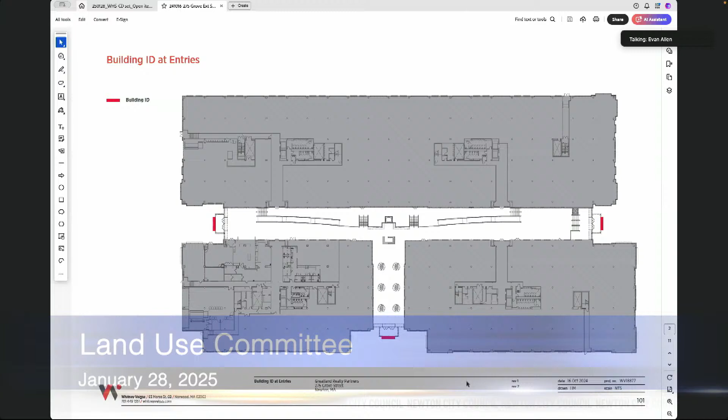As a general orientation to the site and the layout of the building, the structure is really comprised of 3 buildings that are joined together by an atrium, which is this sort of T-shaped white area you're seeing down the middle. Primary entrance to the building off the street is over here at Plan East, with secondary entrances at Plan South for the parking lot and Plan West for an external parking garage as well. So the area we're going to be focusing primarily on today is this area over here at Plan East, which faces Grove Street.

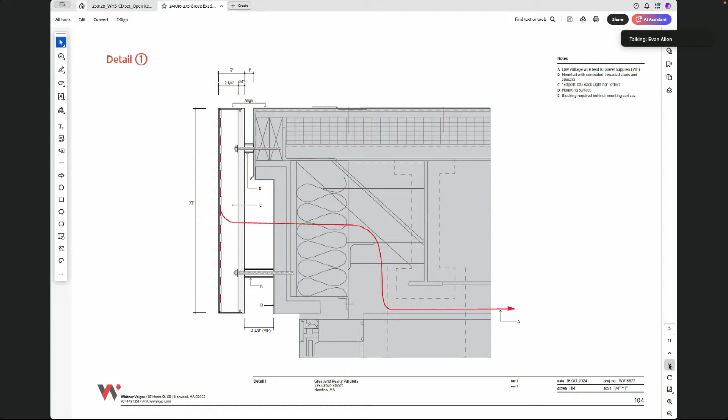Additionally, we're proposing signage for our 4 primary tenants in these buildings. Each of these logos for the tenants would be cut out of metal, cut as metal letters in order to match the 275 Grove address, and they'll be mounted to this black mesh background panel, which is intended to sort of disappear into the background as much as possible, letting the stone shine through, but also creating an even and consistent surface on top of which we can install these cut metal letters for the logos.

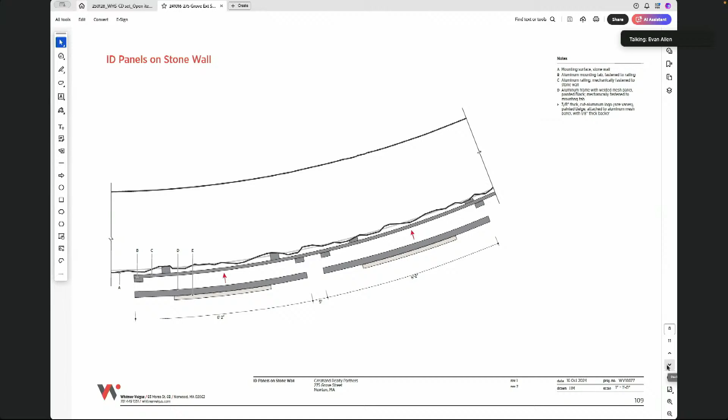We have some construction details as to how we propose these get built and installed. But as mentioned previously, the intention of this mesh is to be as invisible as possible, while also helping create a consistent surface on which to install these logos.

And that is the extent of the presentation. Are there any questions?

Isn't there a request for additional signs also, or is it just this one on the stone wall? The one on the stone wall — currently our special permit only allows for 2 secondary signs. With the 3 entrances, we're requesting a 3rd secondary sign, so we could have that 275 Grove sign on each entrance, the first sign that was presented. If you could flip back to that, Evan.

Sure, yep. Thank you. Thank you.

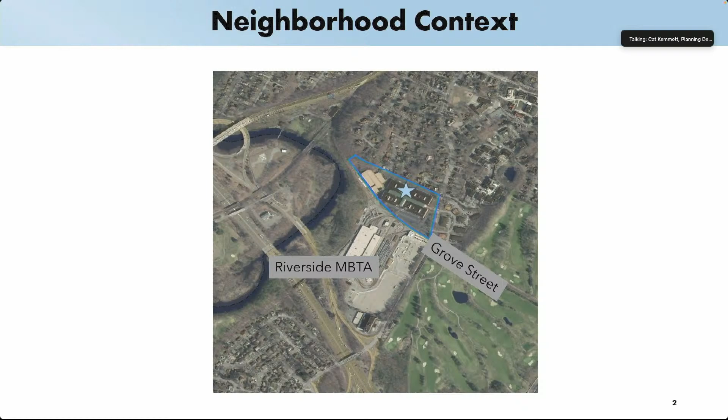The relief here: the petitioner is requesting to amend an existing condition in their special permit which prohibits advertising accessory uses on the site, including restaurants and cafes. There is an existing cafe on the site, so they're asking to remove the language that prohibits the cafe from having a sign. They are also asking to alter an existing freestanding sign to add the names of individual businesses in the building. That requires relief, and they need relief to add that third secondary sign.

When considering this request, the council should consider if the site in BU4 is an appropriate location for the proposed signs, if the signs will adversely affect the neighborhood, if the signs will create a nuisance or serious hazard to vehicles or pedestrians, if access to the site over streets is appropriate for the types and numbers of vehicles involved, and if the proposed exceptions to the sign ordinance should be permitted and are appropriate due to the nature of the use, the architecture of the buildings, or their location with reference to the street, such that such exceptions are in the public interest.

We had no major concerns to note here. We are supportive of the request to allow the advertising of the accessory use and believe it's appropriate for the district. Thank you.

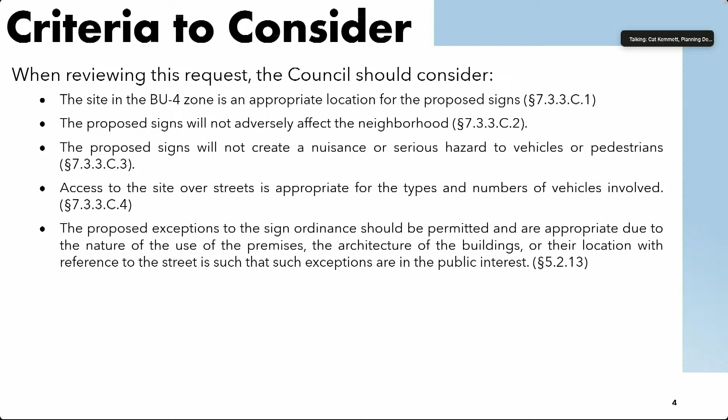Thank you, Madam Chair and members of the committee. My name is Richard Alfred. My wife and I have lived at 73 Grove Street, Auburndale for 37 years. We raised our children here, and we particularly appreciate the nature of the neighborhood being a non-commercial neighborhood. I am the chair of the Auburndale Historic District Commission, but I give this testimony solely in my individual capacity. I'm here to ask this committee to reject the petitioner's request to amend special permit 40-97(2).

The existing special permit prohibits any on-site advertising on the outside or on the grounds of Riverside Center. It includes that prohibition, which I believe came at the urging of the community, because Grove Street is designated a scenic road. There are no signs of a commercial nature on Grove Street outside Auburndale Village, and never have been to my knowledge. While Riverside Center is just outside the Auburndale Historic District, it abuts the district and impacts the nature and quality of the district.

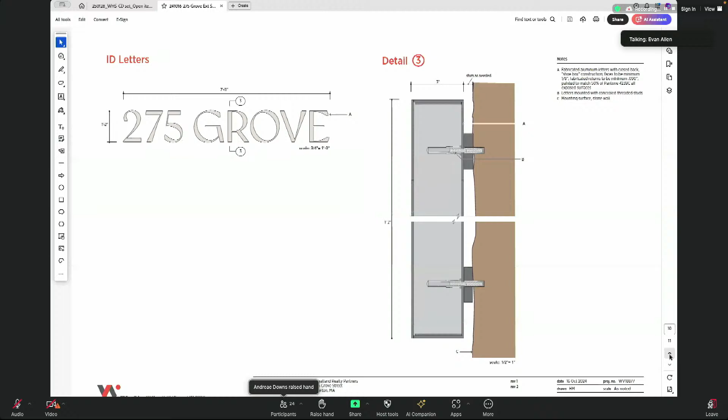In terms of the logos, each resides on a 1'6" tall background, so the total height of each logo would be slightly less than 1'6", with a maximum width of 6'2". While I can't speak precisely to the size of the letters shown on screen now, I'd estimate each around 3 inches tall. So with that, I think the view from the east is quite legible. As we mentioned, the view from the west, you don't really get a great view of the wall from that side. Is there any more detail I can provide?

No, I think that's good. Thank you very much. Counselor Lebovitz, are you all set with that? All right. Counselor Downs?

Thank you, Madam Chair. I have to say, I'm on a scenic road, and I would not consider a sign such as this to be that obtrusive if it were on my street. I align myself with the comments of my colleague from Ward 1. Driving down and biking down Grove Street, which I do at the speed limit of 25, I have no idea what's inside this particular building, or why I would want to visit it. Having some signage there would help me, and I assume others, to know there is a coffee shop there. I don't know how we're going to support businesses if we don't allow them to do at least some advertising. That's it for me. Thanks.

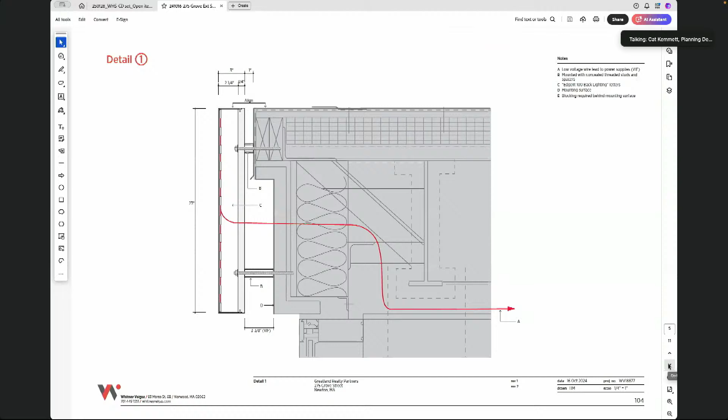The relief is to amend this. It's three elements of relief. The first is to amend the special permit to allow advertising of accessory uses at all - it's currently not allowed. The second element is to amend this freestanding sign to allow individual business names, which would include the Kendall Kitchen sign, and that is contingent on allowing the accessory sign to exist at all. The third element of relief is to allow a third secondary sign - those are the address signs that would be affixed to the exterior of the building.

So again, I'm just trying to understand the relief we're being asked to give, leaving aside the social media advertisement stuff like that. The relief we're being asked to deal with relates solely to the signs on the stone wall.

No, so one element of it's there. Two of them are tied together: the accessory use advertising and the signs on the wall. But there is another element of relief, which is allowing a third secondary sign, which has nothing to do with this wall.

I'm sorry, Ms. Kemmett, I'm having a very hard time hearing you, and maybe that's just me. Okay, can you hear me? A little bit better, thank you.

So this is one of the secondary signs. There are three of these secondary signs, so-called, and two are allowed without needing a special permit, but the third requires special permit relief.

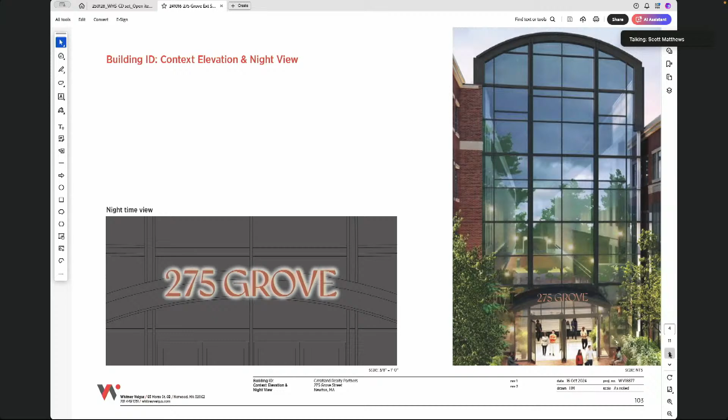Can I just stop you there? So there's allowed to have two secondary signs, and they're looking to put a third secondary sign. Where would that secondary sign be on the premises itself? All three of those would be affixed to the exterior of the building, at the entrances that are indicated here. And then on the stone wall, you're looking to be able to put multiple businesses having some kind of logo on there, right?

That's correct. Okay, all right. I'm good for the moment.

Thank you. Let me just quickly follow up on President Laredo's questions. Two of the signs that are being requested are just address signs that say 275 Grove, and one has the logos of the businesses. Is that correct?

So there will be 3 signs that just say 275 Grove that will be affixed to the building, and those will be new. There will be, I think, 3 that are affixed to the building. Evan, correct me if I'm wrong - is the third one on the stone wall? There are 3 total - 2 are affixed to the building and 1 is on the stone wall. That's how I'm understanding it. Yes, thank you.

Tori, come forward - excuse me, Ms. Kemmett, I'm just going to ask Tori to step in for a second to explain from her point of view. Go ahead, please. So this plan shows 3 secondary signs, one at each of the entrances. The 4th sign is the rock wall that exists today, and we would like to amend that signage to include the tenant signage, which includes the tenant being the restaurant, the accessory use, Kendall Kitchen.

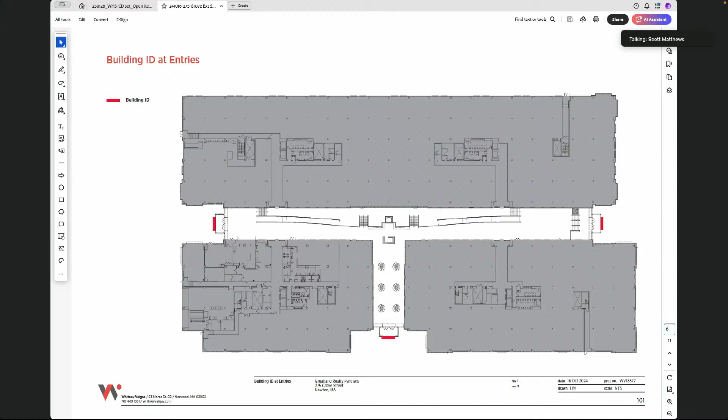So 4 total signs - 3 are affixed to the building, which just give the address. The one on the stone wall gives the name and logos of the specific tenants. Correct, thank you. Councilor Laredo, follow up? That really explained it for me, and I'm sorry for my confusion.

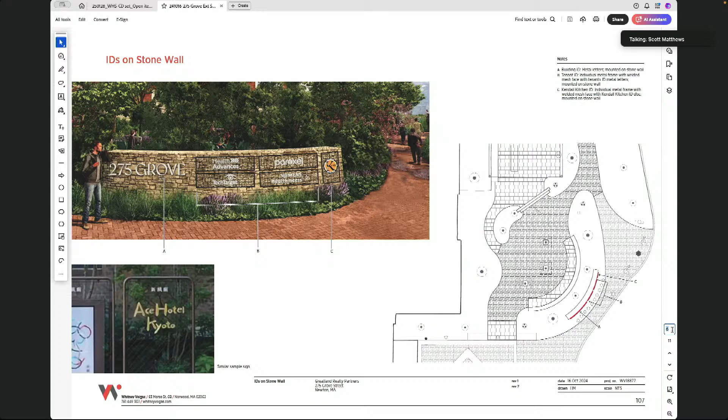So with the 3 secondary signs, they're affixed to the building. They say 275, that's it, right? Correct, as seen on the screen.

I see absolutely no issue with that. You just happen to have 3 entrances to the property. If I'm driving in a certain way, I want to be able to find the place.

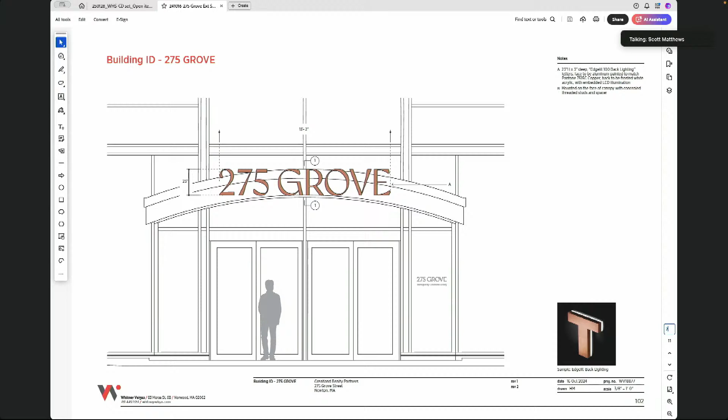So the only other issue is with this principal freestanding sign. The question we're facing is, we can have 275 there already, and the question is, do we get to put some other kind of smaller advertising for a restaurant or some other building occupant? Is that it? Correct, and this rock wall is existing today.

It just says Riverside Center. So we rebranded it to say 275 Grove. Or 275 — 275 is probably better if you're driving by and trying to find where you're going. At least that's how I would do it.

So I guess the only question is, is the advertisement that you're putting on there going to somehow be a negative? You're looking to place more than one advertisement on there — you might have 4 or 5 tenants, correct. And you're looking to do that and get the permit so you don't have to come back here multiple times. Correct. Okay, and do we have some consensus on this?

Are we in agreement as to what the size of that name sign would be? Is that spelled out in the proposed order? I believe it is. Ms. Kemmett, is that correct, the size of the sign? We reference the plans which have the dimensions for the signs in it, yes.

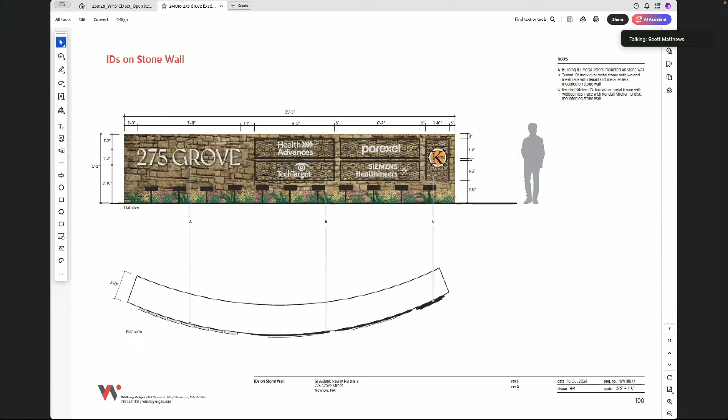Thank you. Would you like to close the public hearing? Yes, I'd move to close the public hearing. Let's do that first. All in favor of closing the public hearing, please say aye. Aye. Aye. Nobody is opposed then.

And we will move on with Councillor Block's motion, but let's hear the findings and conditions first. So for findings, we have 1, the site in the business 4 zone is an appropriate location for the proposed freestanding sign and secondary signs because it's located in a business zone. The signs will improve visibility of accessory uses on site and support the business functions on the site. 2, the site is an appropriate location for the amendment because allowing businesses to advertise is consistent with the intent of the zone and will remove a barrier to local businesses.

3, the signs will not adversely affect the neighborhood because they are of a comparable size and design to other signs on office buildings in the city. 4, the signs will not create a nuisance or serious hazard to vehicles or pedestrians because no changes are proposed that will adversely impact parking or circulation. The signs will aid in wayfinding for visitors. 5, access to the site over streets is appropriate for the types and numbers of vehicles involved.

And 6, the proposed exceptions to the sign ordinance should be permitted and are appropriate due to the nature of the use on the premises, which includes several businesses and 1 accessory use. These exceptions are in the public interest because the site is located in a business zone and the signs will support the business functions on the site while improving wayfinding for visitors and patrons.

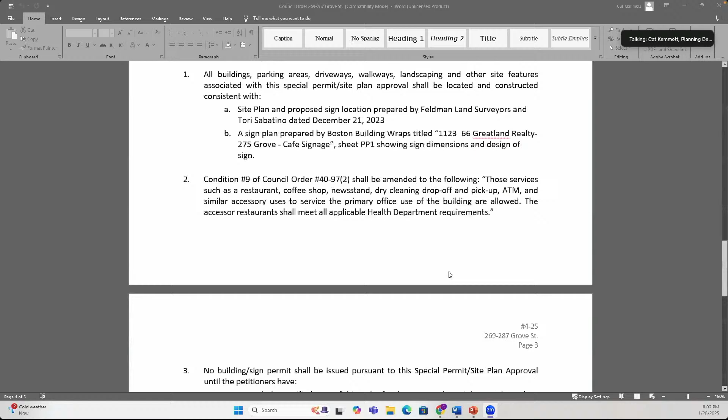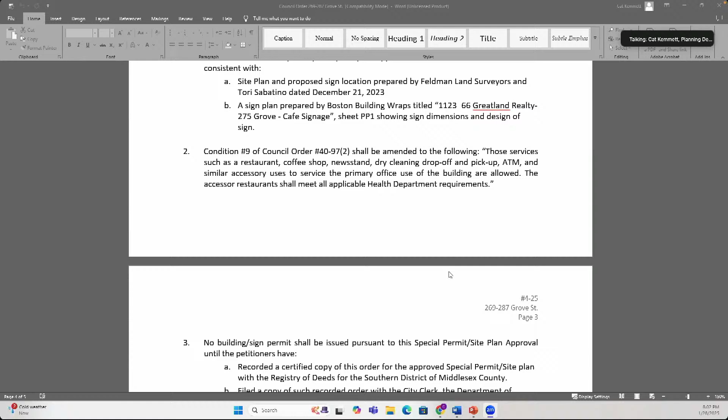And for conditions, the first are the plan referencing. So these plans include the size and orientation of all of the signs that we discussed tonight. Condition 9 of Council Order 40-97 parenthesis 2 will be amended to the following. Those services such as a restaurant, coffee shop, newsstand, dry cleaning drop-off and pickup, ATM, and similar accessory uses to service the primary office use of the building are allowed. The accessory restaurants shall meet all applicable health department requirements. And we also have standard building permit and occupancy conditions.

A further condition was also discussed here to limit the individual tenant signs. That is something that we can add if that is something that the committee wants to see. Thank you, Ms. Kemmett. I would like to get back to that one too before we vote on and before I hear again from President Laredo. Is there a desire to limit the number of signs, say 5, or the size of each individual sign, or would we like to leave that going forward and let them come back if there are any changes? Does somebody want to, Councilor Lucas? Yes, I would like to amend the council order to include a maximum of 5 signs for tenants.

You're making a motion to that amendment then? Yes, and it's seconded by Councilor Lobovitz. Councilor Laredo, can we vote on this before we hear from you? We certainly can, Madam Chair.

All in favor of that amendment, please say aye. Aye. Anyone opposed to that amendment? I'm opposed. I am too. So that's 6 yeas and 2 nos, correct? Okay, so that's an approved part of the amendment.

Councilor President Laredo: So this is for planning. I'm looking back at the original board order, and it calls for an annual contribution to the city's operational intervillage bus service and also the continuous operation of a shuttle service. Have those ever been amended?

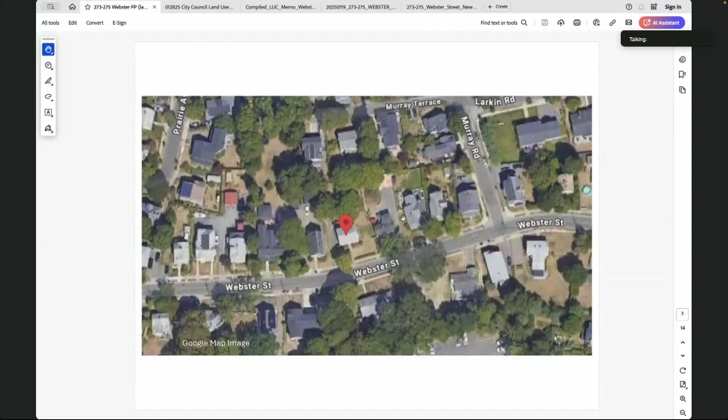Just an aerial photograph for more orientation in terms of where we are located. So to recap very quickly, SR3, we have just under 10,000 square feet of land. The Newton Historical Commission has already reviewed and found the property not preferably preserved. We are existing a two-family with another two-family home. The only zoning waiver we're here for is just to extend a non-conforming use. All of the dimensional requirements are met.

So we're not requesting any relief whatsoever with respect to any of the dimensional requirements of the property. This is the zoning chart from the zoning memo in your packet. As you can see, the proposed conditions are all in compliance with by-right development. We're not seeking any relief. FAR is in compliance, lot coverage is well under the by-right lot coverage, we have well above the open space requirements, and the height of the building is several feet shorter than by-right allowed.

Here's a landscape plan. One thing I want to point out is a request from our landscape architect. I did upload these plans not so long ago, so they may not be in your packet, and this is more of a preference. The landscape architect advised my client that it would be better use of the backyard for this right-hand unit by installing a short 1.5 foot tall retaining/sitting wall that will support and flatten out the patio area.

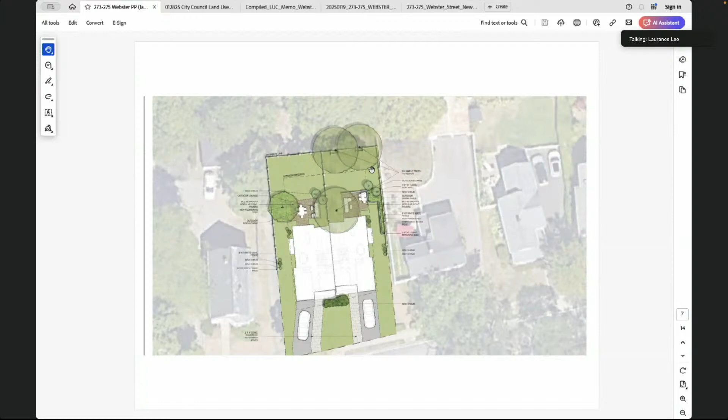Again, it's only 1.5 feet, and it does not require any zoning relief. That's really the only grade change of any significance, if there is any. But if the city council finds it objectionable or does not agree with this change, we can do without it. That's just something we wanted to put before you.

Here's the site plan in your packet that does not have the retaining wall, and the next slide shows the one with the retaining wall. It's just a very, very small change. These are floor plans, also in your packet, and I can go over them if you like as part of my presentation, if you wish to dive into it further.

A couple of renderings generated through computer programs by the architect, just to show some context in terms of a street view. So that's my presentation. I'd be happy to answer any questions.

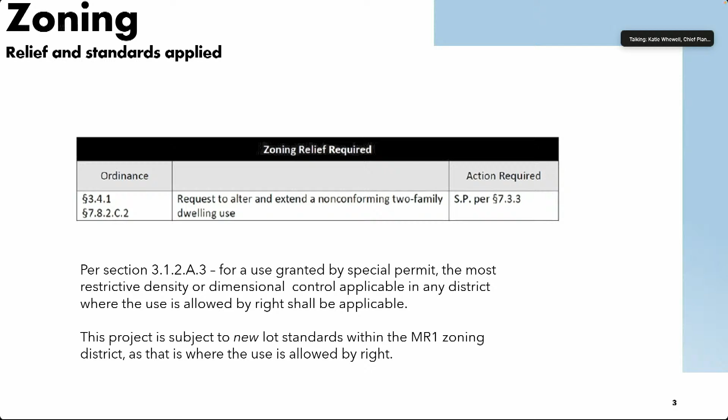When reviewing the request, the council should consider whether the extension of the non-conforming two-family dwelling use will be substantially more detrimental than the existing non-conforming residential use is to the neighborhood.

Just some outstanding items: planning recommended a landscape plan be submitted, and the petitioner did submit those. The petitioner also indicated they would like to add a retaining wall along the right side of the property. They submitted plans showing a retaining wall along the right property line, reaching a maximum height of 1.6 feet where it curves inward to the site. The wall is intended to allow for a more level surface or patio at the rear of Unit 2.

A portion of the wall is within the right side setback, reaching a maximum height of 1.2 feet in the setback. So this wall is considered by right, but it is a change to the plan, specifically the grading, between the initial submitted plan and the revised plans.

They've also indicated they wanted to make changes to the submitted elevations. We have not received those, so if this project is approved, the initially submitted elevations will control. If approved, it could require consistency review, or depending on the nature of the changes, it may be straightforward and administratively approved. That concludes the planning presentation. We're happy to bring up any materials as requested if the council wishes to see them.

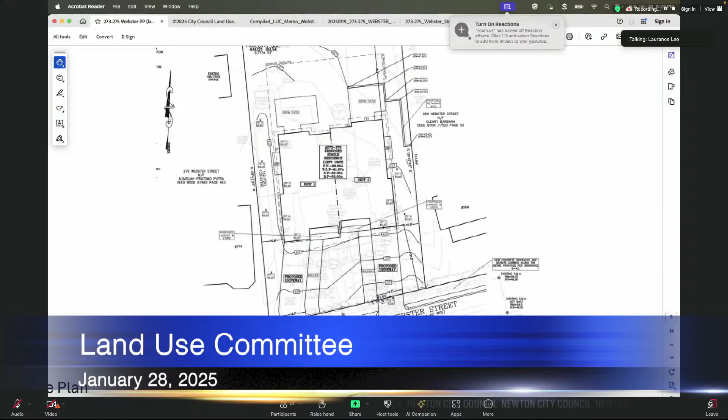The driveway, each driveway, is 12.5 feet wide, so it certainly cannot fit a car side by side. And we're going... Go on, sorry. I'm sorry, so just in terms of scaling, there's a 31-foot setback line here. A typical car parking space is 9 by 19, so if you were just eyeballing this, technically you could fit 2 cars within this driveway. But we have to honor this front setback, so that's why the driveway is the way it is.

Okay. The only thing I will say, for now, if you could, you're at 12.5 feet wide for the driveway, could you just make it a little narrower? We can certainly, if engineering allows us, we can certainly do that. You need engineering approval to make the driveway narrower? Yeah, so we have to have at least a minimum width, typically it's about 10 feet. And if that is acceptable, then we will certainly narrow that out. Okay, thank you.

Your curb cuts are also 12.5 feet, right? That is correct, yes. What's the minimum curb cut width that we require, or maximum, or range, if you know? I think off the top of my head it's a 12 to 20 foot range, and maybe Katie can check me while we're talking, but that's off the top of my head. I think that's right. I will say, I do think Laurance was right that engineering does review curb cuts and driveway widths, and I think unfortunately they're not always aware of the zoning widths allowed. So we try to marry the two, but per the zoning, it is between 12 and 20.

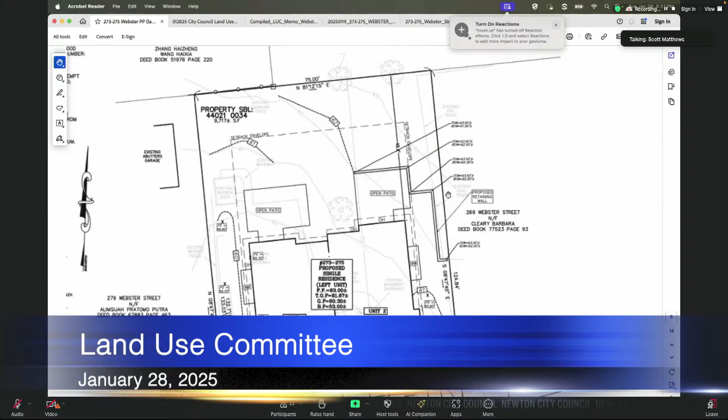And then the other thing is, you were talking about changing the grade potentially by a foot, foot and a half, for that retaining wall. My advice would be to leave it alone. Okay, no retaining wall, keep the building as small as possible from the sidewalk, okay? Understood. All right, I'm all set, Chair. Thank you, Councilor Lucas.

Councilor Leary? Thank you, Madam Chair. Mr. Lee, can you remind me the size of the new house, the two of each unit, what their square footage is? Yep, so approximately the building is 4,500 square feet, with 2,267 being the approximate square footage of each unit. Okay, each unit's about 2,267.

Correct. Okay, so it is significantly larger than the original building there. That is correct, the existing is like 2,578 square feet. Right, and none of the dimensional requirements... this is, FAR is in full compliance. Lot coverage is actually under, so we're over 5% lower on lot coverage, and our height is several feet lower, so we're at about 33.5 feet tall, where 36 is allowed.

And in terms of lot coverage of 30%, we're under that. Maybe I can pull up the zoning table if that's helpful. That's fine, I noted that you needed very little relief on this part.

I mean, I am sympathetic to Ms. Spellwell's concerns about us taking down a more affordable home that's quite a bit smaller and building a new one here. But I don't think that's really our purview at Land Use, so I'm looking at what's before us. And I know people like larger homes too, and we still have private property rights, so I don't have a problem with that.

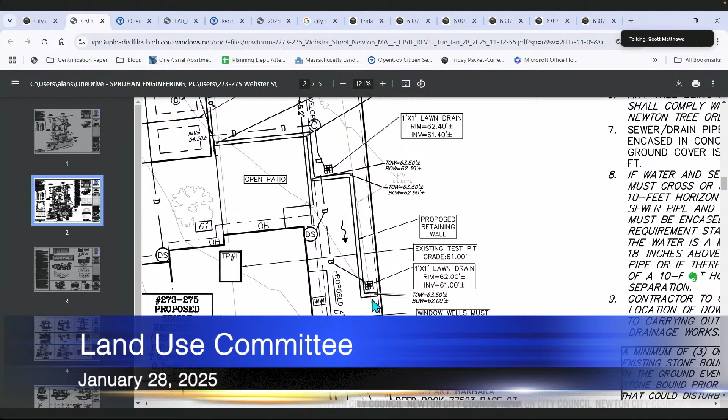Correct. Thank you. Can I withdraw the amendment? Yes, excellent.

I wasn't going to vote for it. Oh. No, I wasn't going to vote for it if it passed, but it's okay. I mean, if you went forward with it.

So let's get back to the motion being made by Councilor Block to go ahead to say yes to the petition as presented, including a 1.5 foot retaining wall in the rear of the right-hand unit.

Planning, for conditions please. Yes, thank you, Madam Chair. So we do have the council order in front of us. The relief is to extend that non-conforming two-family dwelling use in the single residence 3 zone. We pointed to that the proposed dwelling complies with more restrictive dimensional standards for a new lot in the MR1 zoning district. Also, the use has operated as a two-family use since 1953. There are also many other non-conforming two-family uses in the immediate vicinity, and those were also outlined in the planning memo.

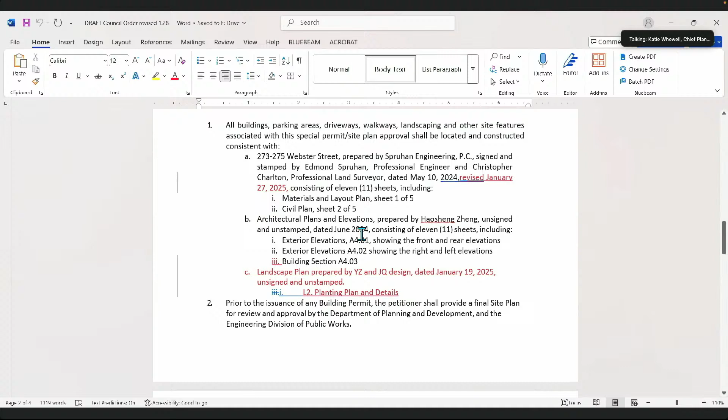And as we scroll down, I did make some changes to the order that you can see in red line here, based on the plans received today. So that includes the revision date to the plans that reflect the retaining wall on them, and then as well as the grading of the property that we will also look at when this comes in for a building permit. Also added the landscape plan that was submitted.

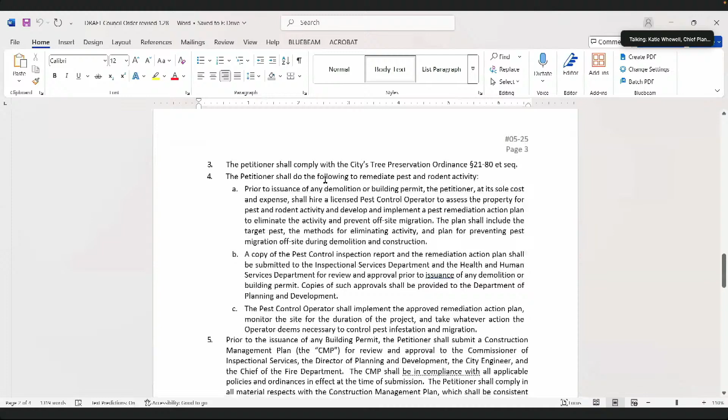And the remainder of the order is pretty standard conditions: pest control, tree preservation, construction management plan, O&M plan, and then the standard building permit condition, occupancy condition, and then electric, even though I'm wondering if that's necessary anymore. So I will check on that. And that is the order as presented.

Thank you very much, Ms. Whewell. Let's go ahead and take a vote. Counselor Block, Aye. Counselor Downs, Aye. Counselor Kelly, Aye. Counselor Leary, Aye. Counselor Lovovitz, Aye. Counselor Lucas, Aye. Counselor Laredo, Aye. Motion passes.

Okay, thank you. Our last item for the night is number 362-24. We've seen this before, but it's come back in an altered version. It's a request to allow 4 single-family attached dwellings, and we'll hear that that's no longer the case, to reduce the side setback and to allow a driveway within 10 feet of the side lot line and parking within 20 feet of a boundary line at 51 Oak Ave. Mr. Morris, I see you're already at the podium.

Thank you, Madam Chair, members of the committee. Thank you for your perseverance. It reminded me of those times when I used to sit over there and think to myself, you have to love what you do, whether you're on this side of the aisle or that side of the aisle. I'm pleased to report that at the last meeting, back in the fall, it was suggested that we seriously take a look at reducing the number of units, and we actually immediately set about to do so. The results of that work we're presenting here this evening.

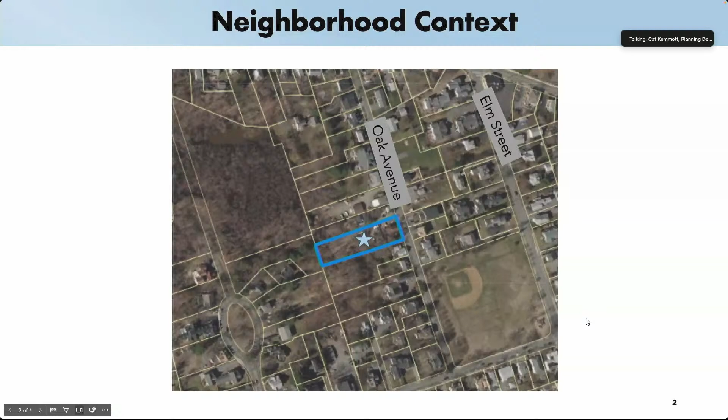The petitioner is proposing to demolish the existing building and construct 3 single-family dwelling units in 2 separate buildings, with 2 units in the rear building and 1 at the front. This is different from the previous design, which had 4 dwelling units in total, so that has been reduced to 3 units. The relief needed for a driveway within 10 feet and parking within 20 feet of a side lot line no longer applies, so that's been removed from the zoning relief shown here. Other changes include a revised landscape plan and the inclusion of permeable pavers.

The current design for the project needs 2 elements of relief: for the attached single-family dwelling use, and to allow those reduced side setbacks.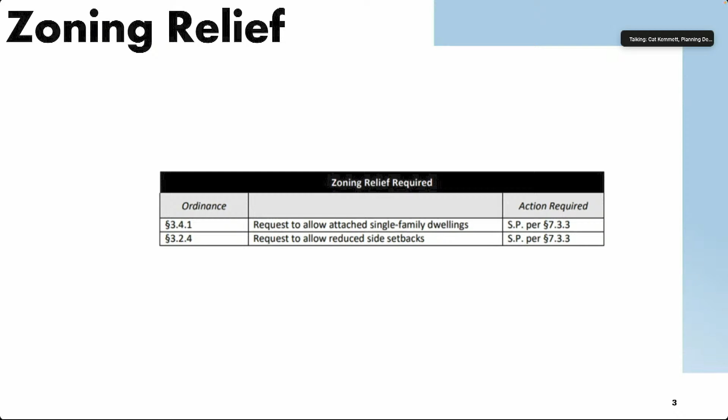In terms of criteria, the council should consider if the site is an appropriate location for the proposed development with reduced side setbacks, if the project as designed will not adversely affect the neighborhood, if the proposed development will not create a nuisance or serious hazard to vehicles or pedestrians, and if access to the site over streets is appropriate for the types and numbers of vehicles involved. I am happy to bring up any materials or plans submitted at the committee's request.

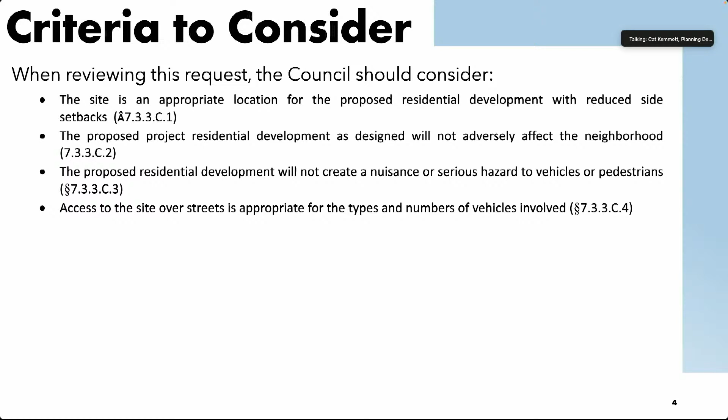That concludes my comments. Thank you very much, Ms. Kemmett. Let's first see if there are any members of the public who would like to speak or ask questions. I see none in the chamber. I'm seeing if any hands are up on Zoom. I'm going to give it a minute or half a minute. And if you are here and think of wanting to raise your hand later, go ahead.

As far as I know, we have not received official letters from any neighbors. I know I have heard from some of them myself. Mr. Morse, did you want to speak to that? Yes, there were 5 or 6 neighbors that appeared at the last hearing, 2 of whom we had email addresses for.

The people who live across the street, Jeff Zabel and Kathy Kale, we sent them full copies of the plans more than a week and a half ago, full sets. And Mr. Fran Urati, who lives at 21 Oak down the street, who you may know is an activist following land use matters, we did the same, sent him a full set of plans a week and a half ago. And then I advised my client to go out and knock on doors, specifically identifying the people who had spoken previously, and he reported back to me that he had done so.

No objections, but you did good community outreach. Girardi had asked about parking, and my response to him by email was that the reduction in the number of units would obviously reduce the number of cars going to and from the site. And it looks like there's some capacity on site for guest parking too.

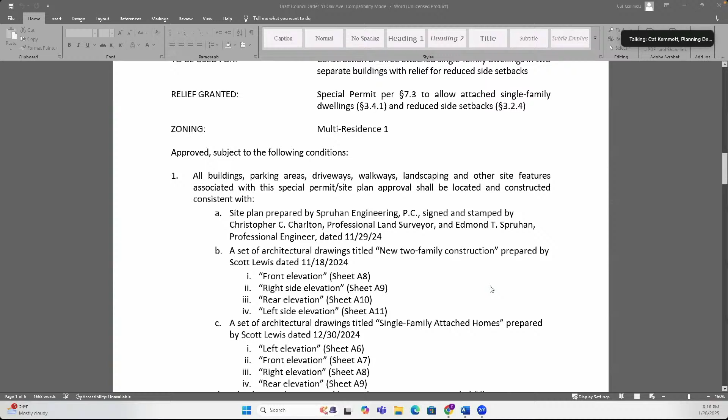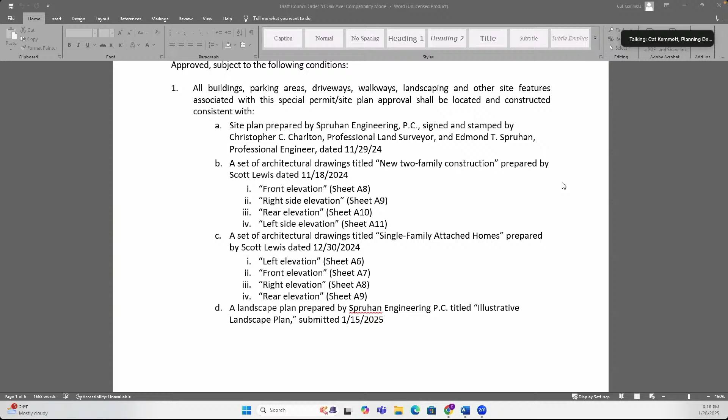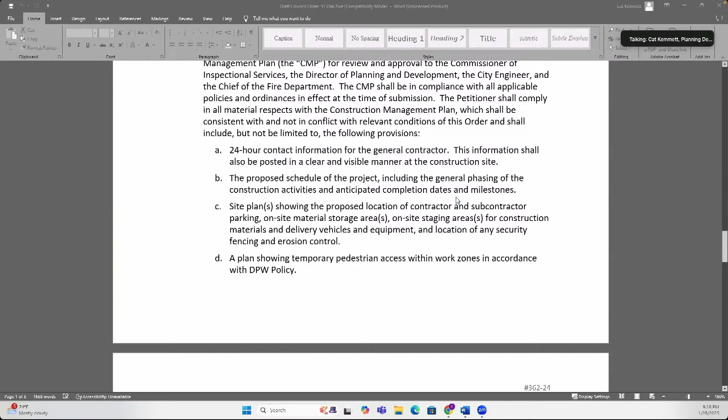And the conditions include the plan referencing - that includes the architectural plans for the 1 unit in the front and the 2 units in the back, and the site plan and the landscape plan. They will need to provide an operation and maintenance plan, pest and rodent activity remediation, and a construction management plan will be required. All electric, and standard building permit and occupancy conditions would apply here. And all landscaping would need to be as is shown in the landscaping plan.

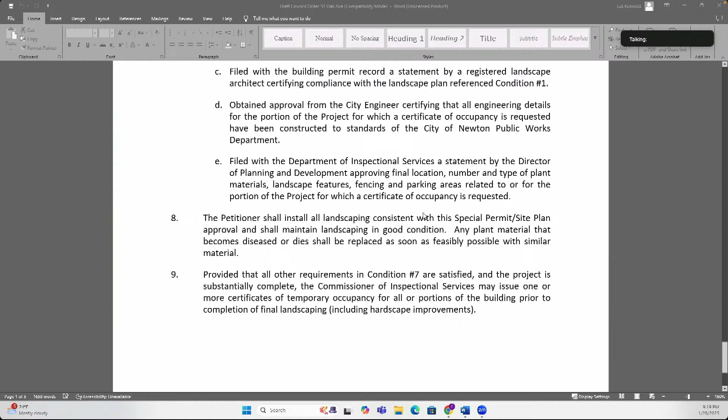Thank you. I think we're ready to vote. Counselor Block, Aye. Counselor Downs, Aye. Counselor Kelly, Aye. Counselor Leary, Aye. Counselor Lobovitz, Aye. Counselor Lucas, Aye. Counselor Laredo, Aye. Motion passes.

Yay. Madam Chair, members of the committee, thank you very much for your input into this project, which I think is far better than the one that was first presented.